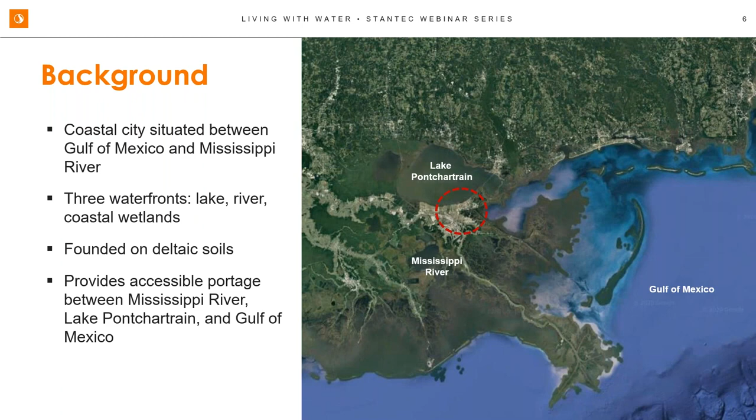Just to give you an idea of the terrain, on one side is the Mississippi, Lake Pontchartrain on the other side, and basically New Orleans is in a big bowl. It's below sea level, at times 10 to 15 feet below sea level. You can see where the blue-green corridors of the Gentilly Resilience District lie, at one of the lowest parts of the city. The whole city is protected by flood walls and levees along the Mississippi River and Lake Pontchartrain, which over the years, when a disaster happens like a Mississippi River flood or a hurricane surge on the lake, it'll fill the bowl. So when we've had breakages, we've built higher and made the system more resilient as these things have happened.

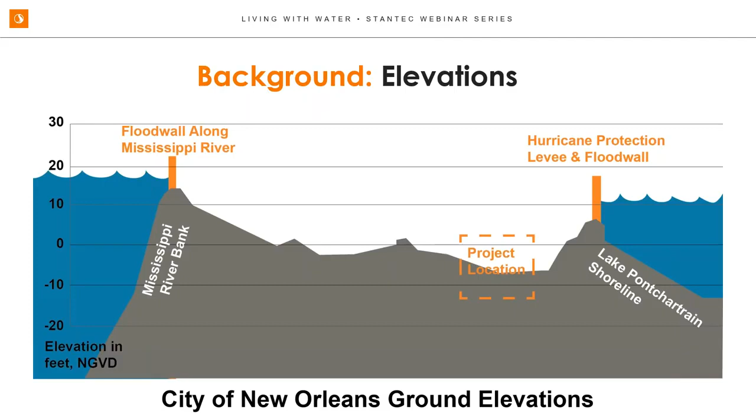Over the years in the 20th century, a drainage system was built. Pumps were built, levees, canals, and it allowed us to develop land that wasn't developable before and control some of that flooding that was uncontrolled in the early years. They were giant pumps - some are still in operation today - and New Orleans became the model for other areas on how to handle stormwater and control these really large flood events. It allowed us to develop areas like Gentilly, which was really a swamp. It's one of the largest pumping systems in the world, over 50,000 CFS for the entire system.

And it was strengthened over time. But even with all this pumping capacity and these giant pumps, the system can still be overwhelmed because New Orleans is in an area that gets really strong rain events. We get over 55 inches of rain per year, and we get some really intense storm events.

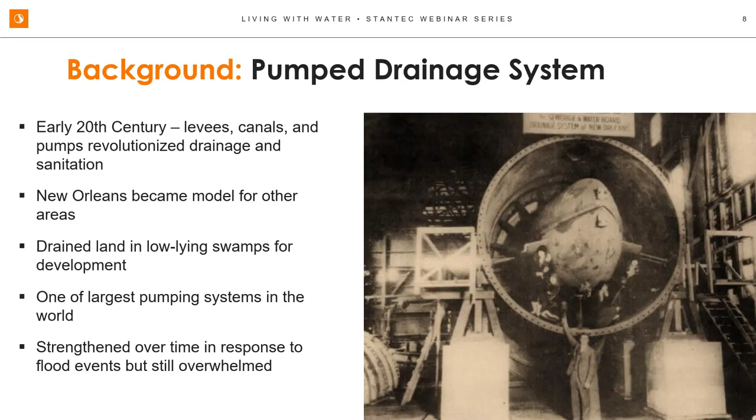One other thing that over time has really been a stressor to New Orleans is sea level rise, and more intense storm events. We've gotten really intense storm events, especially in the last 5 or 10 years. There was a storm event that gave us about 8 inches in 2 hours in a big part of the city, causing a lot of damage and flooding - that was only a couple of years ago. So we've been seeing these 100-year, 500-year storms, which you wouldn't expect to see very often, a lot more frequently.

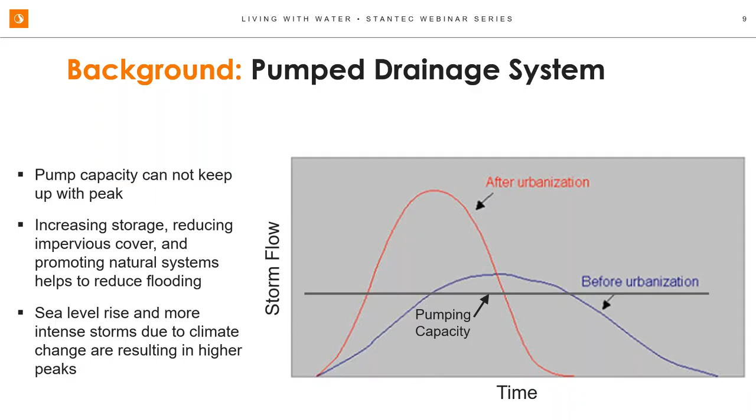Now, in 2005, everything changed with Katrina. There were over 1,833 deaths of people who lost their lives. It's interesting because the evacuation was actually really successful - about 99% of the people were evacuated. But the people that were left behind had nowhere to go, and in some cases there was about 15 feet of flooding in their neighborhoods. They just couldn't get up high enough in their houses. There were 50 levee breaches, and about $81 billion in property damages resulted from the storm.

You can see right there on 17th Street, that was one of the big levee breaks. The levee basically fell apart, and all the water from Lake Pontchartrain just poured right into the bowl and filled it up right to sea level. Approximately 80% of the city was flooded, and the pumping system was basically useless because it was all flooded, all the electrical systems were flooded, and the operators weren't able to operate the system.

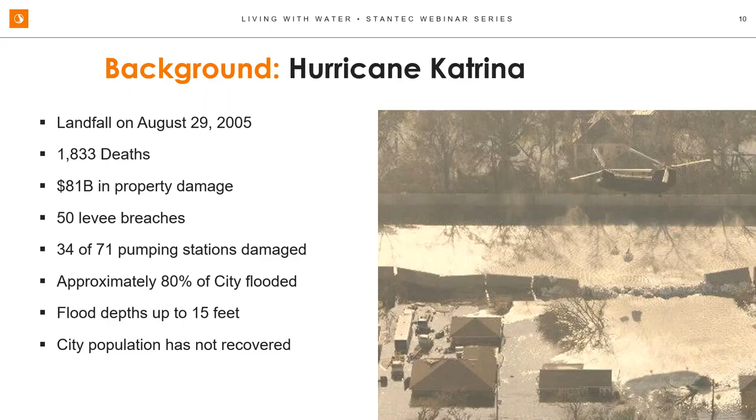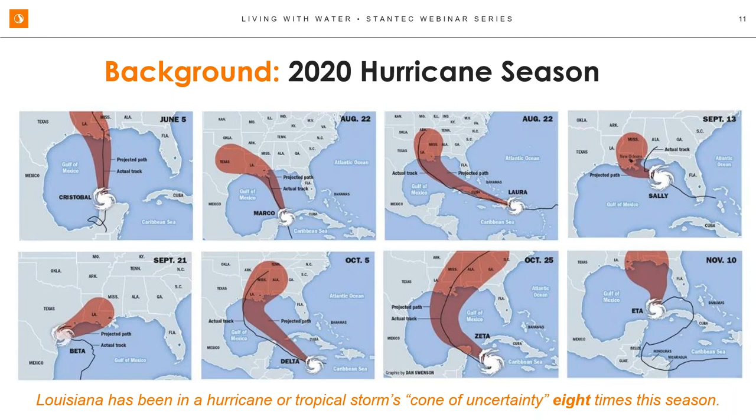This isn't a historical thing, we still see this threat from hurricanes. This hurricane season we've been in the cone of uncertainty 8 times. We got hit a couple of times, and this last one caused a lot of power damage, trees that fell, and branches. Luckily we didn't get hit with a major catastrophic storm, but our residents always live with this fear of when the next storm is coming, and we know at one point one of these big storms is coming. So we always have to build things with resilience in mind.

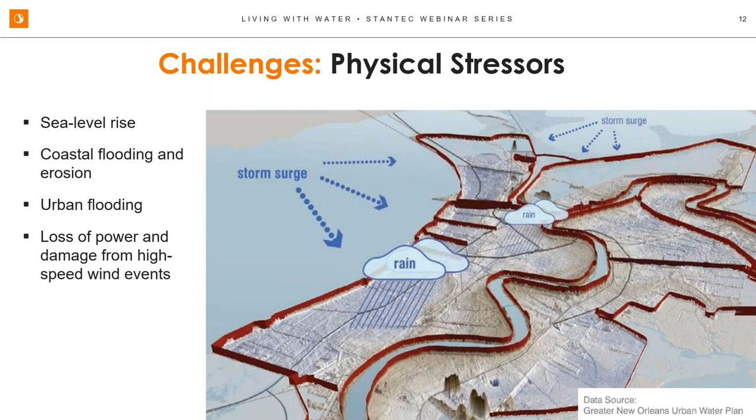Some of the stressors we have are sea level rise, coastal flooding and erosion. There's marshland south of New Orleans which historically protected the city from hurricane surges, and that has been eaten away over time. There's urban flooding as these more frequent storms have happened, and as I mentioned, loss of power. We spent a week and a half without power last month based on a hurricane that came through, affecting pretty much the entire city.

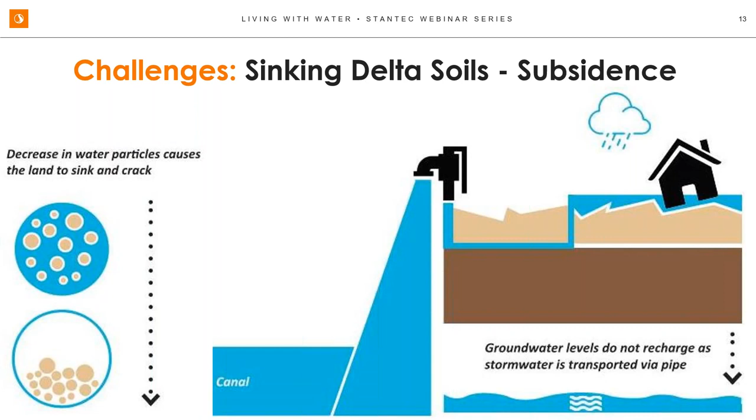Another challenge we have is subsidence and sinking delta soils. What we've always tried to do in New Orleans is pump the water out as fast as possible to get it out so it doesn't cause flood damages. What that's caused is those marsh soils, those organic soils, to dry up, and as they dry up they cause subsidence. You can see it in our roads, our houses, even sidewalks that settle. That's a big issue we have to deal with, and this project tries to find solutions for that as well.

Another challenge is the social stressors. A lot of these low-lying areas are low and middle income, and they get hit harder by some of these flooding events, because the upper areas, like the French Quarter, were built first on the high ground. These other neighborhoods that were built after are some of our lower income areas, as you can see by the graph there.

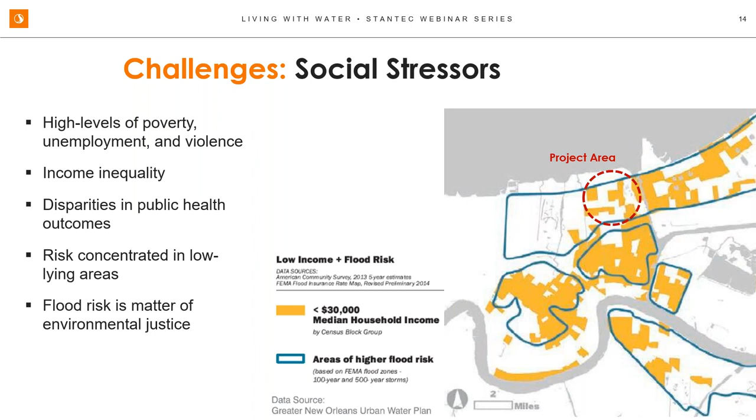There's our project area in red, but there is some sort of social inequity in how they experience this flood risk and the damages we see on a yearly basis here in New Orleans.

Talking a bit about building resilience: when Katrina hit, the Army Corps of Engineers and federal government put in $14.6 billion. The state and New Orleans also put in smaller projects, but this was basically to reinforce that ring around the hurricane risk reduction system around New Orleans. About 350 miles of levee and flood wall were strengthened. There were canal closures, really all the levee breaks happened in those 3 canals you see under the red circles, 17th, Orleans, and London. So the protection was pushed out to the lake to ensure that didn't happen again.

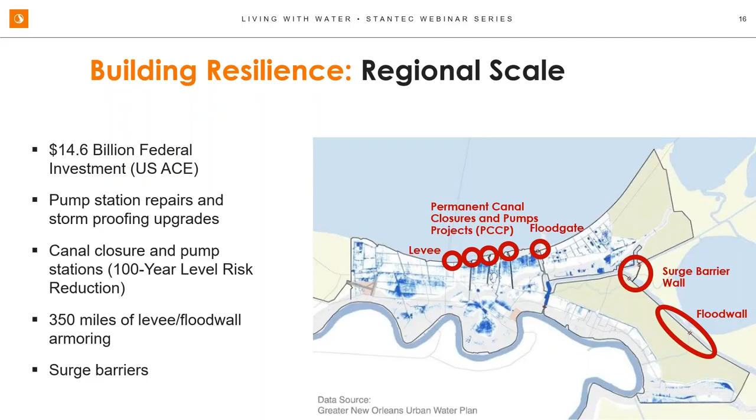There were also some pump stations and other big projects done as part of that 14.6 billion, basically to build back stronger and have a higher level, 100-year level of risk reduction for the city, at a regional scale.

The projects that were built really took resilience in mind. The pictures you're seeing are of PCCP, a project I worked on and led, which was a $731 million investment. It involved a big pump station at the lake, and included some flood walls and storm surge gates to close the drainage system and keep water from getting into the city. The pump stations that were added were able to drain a big part of the city once you close up for a hurricane.

And the pump station itself was 24,300 CFS. To give you an idea of that capacity, that is a lot of water coming through. It's 3 big canals, drainage canals that drain the whole city. And that fills an Olympic-sized swimming pool in 4 seconds. So it's a lot of water.

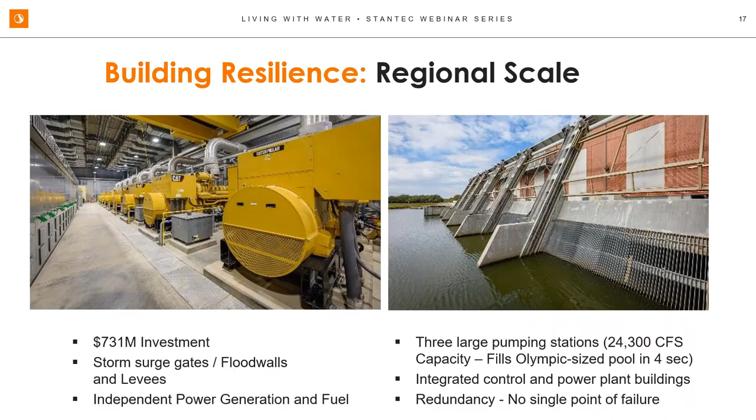These facilities were built to make sure that Katrina didn't happen again. They have independent power generation and fuel so the facility could be separate from the rest of the world for 5 days and operate. It has a lot of redundancy built in, and what we didn't want to have is a single point of failure. So all the electrical and mechanical systems have backups to make sure this facility could work when it's actually needed during a hurricane.

Go to the next slide.

But the city has been looking at alternate solutions and better ways of being resilient. One of the ways is moving from a completely gray system to a combination of gray and green infrastructure. I mentioned that things were being pumped out as quick as they came in. Well, green infrastructure slows things down and tries to smooth out that hydrograph at the peak of the storm by providing storage on the inside of the system.

One project about to finalize construction is Hagan Lafitte, and it includes a combination of gray system piping and reallocation of the basins plus green infrastructure to provide a complete system. We've seen reductions of flooding up to 4 feet in the model. That includes porous pavement, rain gardens, park upgrades, basically providing pervious areas wherever the neighborhood offers opportunities.

Go to the next slide.

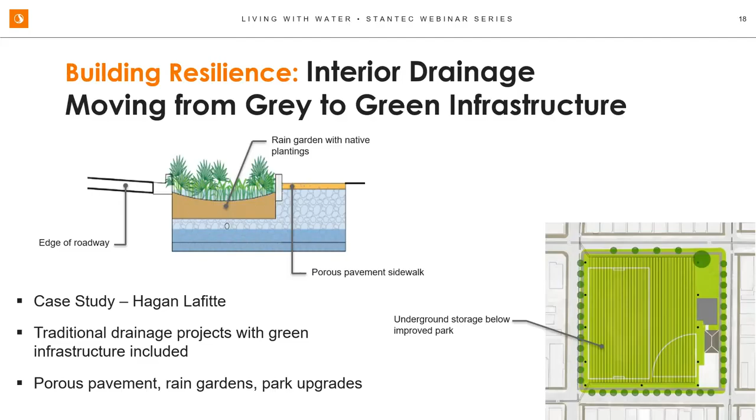So let's talk a little bit about the plan in action and blue-green corridors and how it relates. That's giving you a little history and background. Now the city applied for NDRC, National Disaster Resilience Competition. This is a competitive grant funding to recover from past disasters. So in order to qualify, you needed to have had a past disaster happen in your city. But the focus of the grant is to improve the ability to withstand future events, future hurricanes, and to be resilient, to come back quicker.

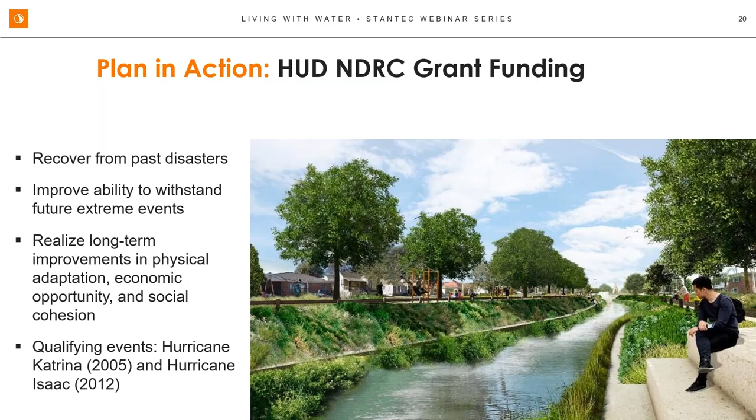And it really focused on the physical adaptation, which are physical improvements that we can make to the system, but also on economic opportunity and on social cohesion. So it's a HUD grant, and it's not just flood reduction. It focuses on really bringing the community back and focusing in on different aspects of resilience.

Go to the next slide.

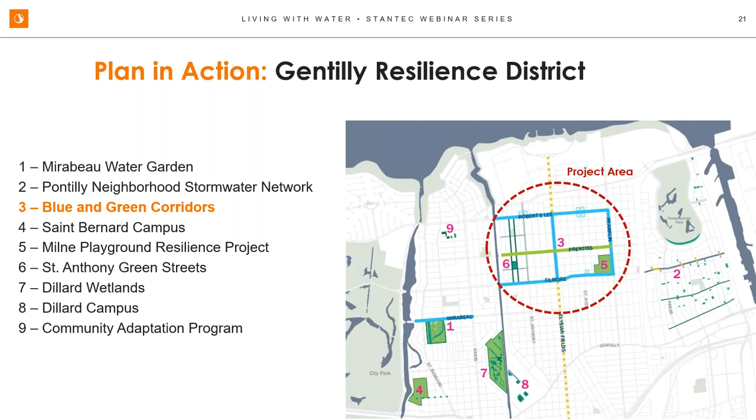So what the city submitted in the application was a number of projects. You can see the 9 projects there on the side for the Gentilly Resilience District, and it was creating a resilience district to get to a tipping point where these projects really improve the quality of life for the residents there. So it focuses on drainage as the main part of it, with enough green infrastructure and drainage interventions that it really causes an effect for the whole Gentilly neighborhood. But it also provides different amenities and things to really improve the quality of life there. And that's really the focus of the Gentilly Resilience District.

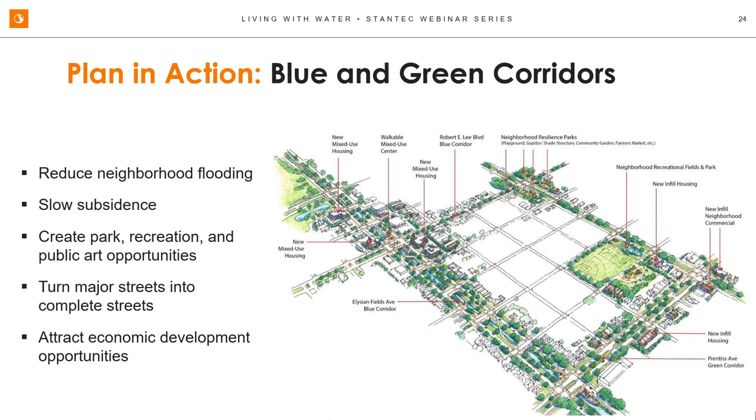So really this project is a shift in thinking: how can we use nature-based practices to capture water where it falls and promote infiltration back into the ground, while creating park and neighborhood amenities, providing safer routes for pedestrians and bicyclists through complete streets thinking, and attracting economic development opportunities. The intent is to manage water more successfully and to maximize the funding to provide the most benefit for the community.

Blue and Green Corridors is the largest of the Gentilly resiliency projects—a $40 million construction budget covering a significant amount of roadway. On the screen you see Robert E. Lee Boulevard and Fillmore Avenue, the east-west streets, roughly between London Avenue Canal—one of the canals that had a severe issue during Katrina—and Franklin Avenue to the east, plus Elysian Fields Avenue running north-south. That's about 3 miles of linear corridors we have to work with.

We're also looking at two stormwater parks at Robert E. Lee and St. Anthony Avenue, and four stormwater parks at St. Roch and Robert E. Lee Boulevard. Currently those are vacant grass lots with some trees we'll preserve, but we'll be looking at ways to use strategic storage within those lots to work within the system.

In addition to flood management, these corridors will be used as stormwater management facilities—I'll go into how we're doing that in a few minutes. But beyond that, we're looking at how to make the most of the money we have. Within these corridors there'll be improved planting—instead of turf, grasses and shrubs and practices that promote infiltration back into the ground, reducing the volume of water while also providing a water quality benefit. We're introducing lots of trees, playgrounds, and fitness areas, all with the intent of creating an amenity within a 10-minute walk for everybody in the neighborhood.

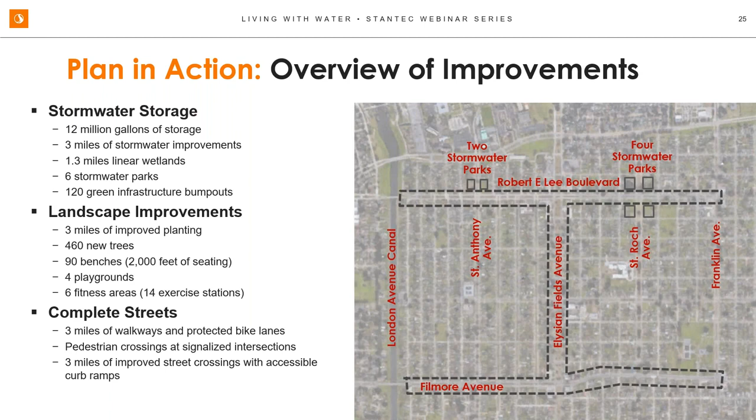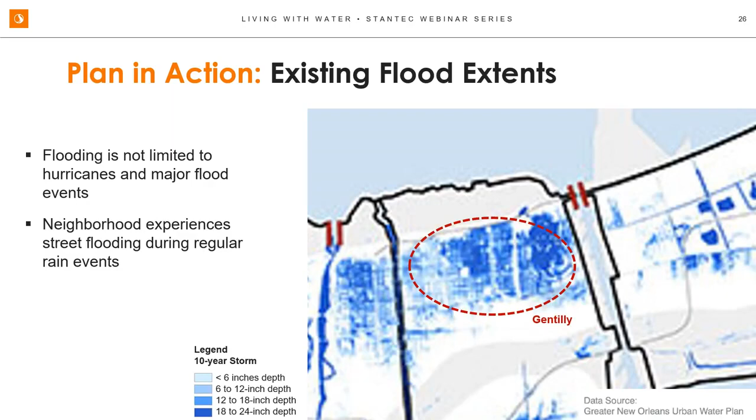Gentilly is an area within New Orleans that has seen tons of flooding over the years, not just from large hurricanes, but really from daily storm events as well. They get over 55, 60 inches of rainfall a year. So really it's looking at how can we deal with water in this bowl-shaped community that's sinking more and more every day.

We see groundwater maybe between 4 and 6 feet below surface grade. So that really presents a challenge as well: how do we strategically collect this rainwater and get it back into the ground?

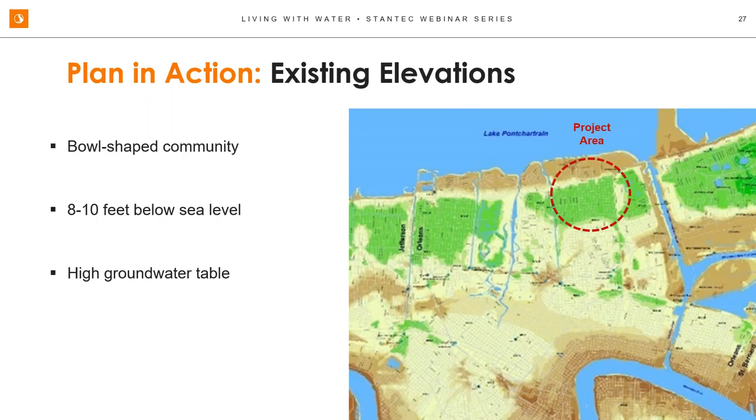The pumping system in New Orleans is very specific to this area. Again, it's that bowl-shaped community with perimeter controls around the outside. So when we get rain from a regular storm event, the issue becomes how do we deal with that rain? In the existing model, water is collected in catch basins or inlets on the street, routed into small pipes, then into larger pipes, into underground canals, Prentiss Avenue being one of them, eventually making its way to a pump station where it's pumped into an above ground canal, in this case the London Avenue Canal, and directed north to Lake Pontchartrain. So it's really a single source stormwater management system.

This shift in thinking that we're looking at is how can we collect water where it falls and strategically use that storage to prevent strain on the pumping system. How can we remove impervious cover and promote infiltration into the ground so that water doesn't make its way into the storm network system?

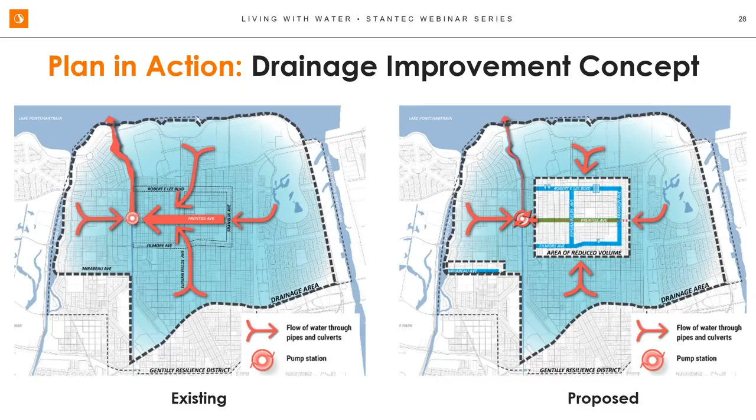On the right side of the screen is an approximate area of the project, where we're looking at finding strategic ways to pull that water out of the system during the peak of the storm event. As Dan mentioned with that hydrograph, the peak is what we're trying to manage here, because that's what results in this nuisance flooding we see so often. If we can create these strategic storage areas that temporarily hold the water, there's a lot of value in that, so it can be released back into the storm system after the peak of the storm has passed.

In most cases in New Orleans, there are streets divided by medians or neutral grounds, grassed areas that are mounded, that push the water back toward the edge of the street where it's collected in inlets and catch basins and routed to pump stations. Unfortunately, the neutral grounds don't provide much benefit here. They are pervious, which is good, promoting a little infiltration back into the ground, but they're not used in any way for flood management.

In our proposed design, we're planning to shift the water from the inlets back into the median, excavating 10 to 12 feet below the existing grade to create a permanent pool of water, a depth of maybe 4 to 6 feet, with a little bit of freeboard on top, another 4 feet or so, to handle those flood waters. The interesting thing here is that it's not just a drainage ditch. It's something we're trying to create an amenity out of, to tie down on those triple bottom line benefits that Dan mentioned.

So flood management, but also looking at the social value of adding a waterway into an area where New Orleans is interesting because it's surrounded by water on all sides, and the city has its identity built on water. But once you're inside these neighborhoods, you realize you're surrounded by concrete levees and flood walls all over the place. There really isn't that feel or sense of water. So this is really an innovative and creative way to invite water back into the community.

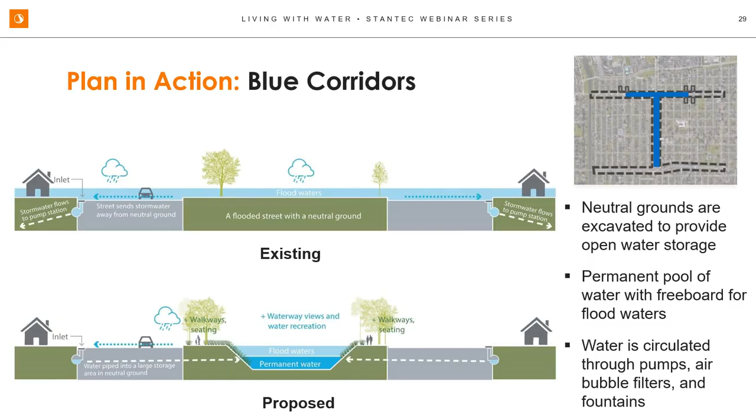In these canal systems, or linear wetlands as we're calling them, the water is circulated through pumps. There are air bubble filters, similar to what you'd see in a fish tank, that provide oxygen to the system. We also have pumps to circulate the water and fountains for more amenity.

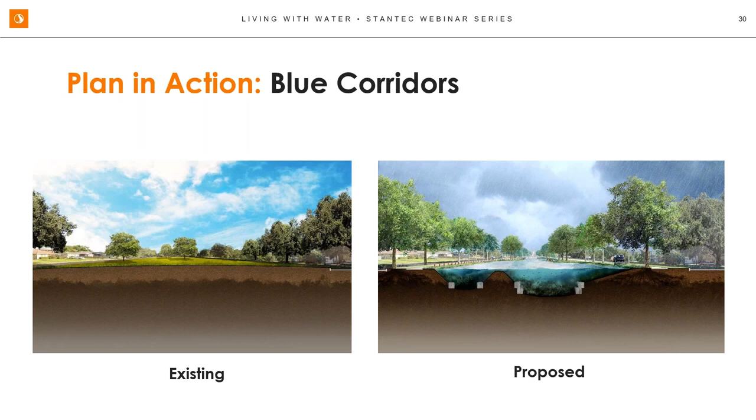You see two sections there. The main channel is a little deeper, and that'll be our linear wetland system. On the left of that proposed image is what we're calling a backflow marsh area. Those areas are slightly higher in elevation and have less water. The intent is to use them for flushing out the water and providing additional water quality benefits. As the water circulates within the system, it'll be brought to the top of a backflow marsh area and then flow back into the main channel. We have several of these throughout the corridor.

Green corridors are corridors that we're retrofitting with green infrastructure technology. In these cases, they weren't able to be blue corridors based on the width of the existing neutral ground or existing utility conflicts that prevented us from digging down as deep as we did on Elysian Fields. Again, in the existing condition, the neutral ground is slightly elevated and pushes water back to the edge of the roadway, where it's collected and sent to the pump station.

On these streets, we're looking to expand the pervious area to the greatest extent. Some of these streets were originally two lanes, and through our traffic analysis, we found they didn't need to be two lanes everywhere. The roadway widths were actually quite wide and didn't need to be. So we took advantage of some of those areas to create road diets, reducing the roadway width to make room for the additional green space we were seeking.

Green infrastructure practices thrive on the concept of capturing rainwater and managing it where it falls, to keep it out of the stormwater management system. This is particularly important in smaller storm events, where we're really seeing flood issues in the neighborhood. Green infrastructure is perfect for this because it's designed for that smaller storm event, and the intent is to promote infiltration back into the ground. You create temporary storage areas that can hold the water long enough for it to filter through the soil back into the groundwater.

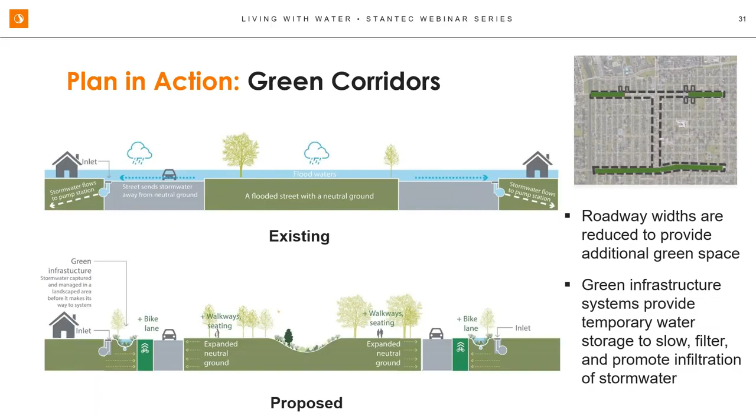What you see here is that while they create slight depressions able to hold water, in normal conditions they would be dry. So these are the two types of green infrastructure practices we're using on this project.

Median bioswales will be used within the median or neutral grounds. These are temporary storage areas planted with high quality native plants and trees, with a very absorbent soil, about 18 inches of an engineered soil media. These systems are all relatively shallow in the vertical direction because of the groundwater condition we have, so the intent is that they'll be flatter and wider systems than a typical green infrastructure installation.

On the right side, you see a stormwater bump out. A stormwater bump out is essentially a curb extension, where we take the curb and project it into the street, typically within a shoulder or parking lane. This can be done at intersections, as shown here, but mid-block is also quite common. For this project, we have bump outs at every single intersection, capturing the water as it comes down the street prior to entering an existing inlet structure.

Beyond stormwater benefits—promoting infiltration back into the ground, providing a site amenity, and improving water and air quality—this is also used as a transportation improvement, bumping out to reduce the pedestrian crossing distance across the street. This makes cars slow down because the road narrows in those locations, and it makes pedestrians feel safer since the crossing distance is shorter.

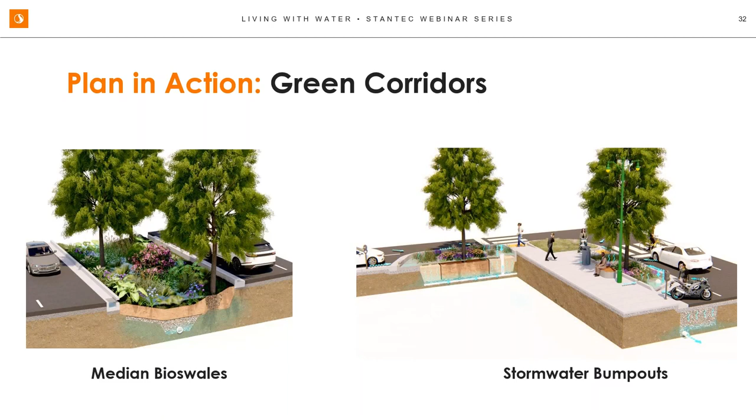We're also looking at parks with co-benefits. These are the 4 lots I mentioned earlier at St. Roch and St. Anthony, and Robert E. Lee Boulevard - vacant parcels taken over by the city over the years. The intent is to look at this with a triple bottom line approach: how can we address flooding, but also add site amenities to build social and environmental awareness and cohesion in the neighborhood.

These parks will have a mixture of open storage. Two parks will have water features with a permanent pool of water, and the other two will have more green infrastructure or temporary storage that can be flexible space - a slight depression in the ground to capture and filter stormwater runoff. During a dry event, they could also be used as seating areas or recreational space, making the best use of the space we have and creating the most benefit for the community.

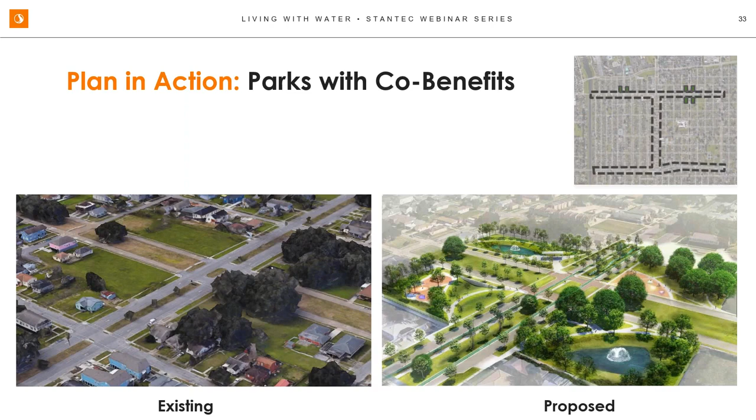We're also very focused on creating amenities throughout the corridor. We've done programming studies on how these corridors can become links to existing destinations, and how we can make these roads feel safer with better walkways and safer bike lanes so everybody feels comfortable. We also looked at how these corridors can become destinations in themselves, looking at 10-minute walking distances, as shown on the map, trying to put features along the corridor so there was something for everybody.

Not only do we have the 4 parks on the perimeter of Robert E. Lee, we have bicycle stations, fitness equipment, parks, and other recreational benefits, step-down areas for the wetland systems within Elysian Fields Avenue, Robert E. Lee, and Fillmore. We've also studied how these could be used as recreational and exercise loops, with signage indicating good running loops or exercise equipment loops. We've really thought through a lot of the programming on a much higher scale.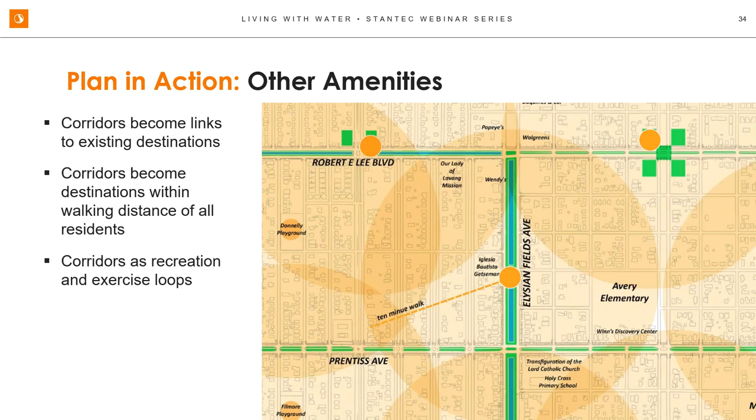There's accessible curb ramps at every intersection, stormwater bump-outs which reduce pedestrian crossing distance, and we're implementing bike lanes on every street in this project with bollards and striping - really to make them feel like they have their own dedicated space, provide safety, and encourage everybody to use this space without a vehicle.

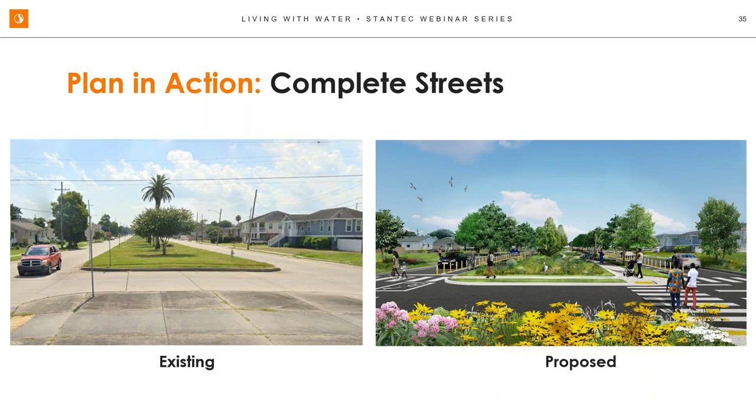There's 3 phases of this project. Phase 1 is Robert E. Lee, the east-west street on the north side, and Elysian Fields Avenue, the main street. Phase 2 is Fillmore Avenue, the east-west street on the south side of the project. Phase 3 will be the 6 lots. The intent was to debundle these packages so we could get everything moving and construction moving sequentially on all 3 projects. All work is meant to be completed by fall of 2022 - pretty exciting.

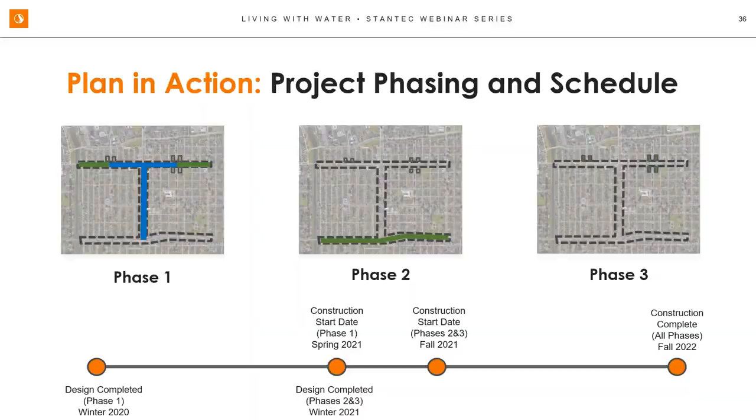With the HUD funding, there's a lot of documentation needed to define the benefits and ensure the investment is sound. As I've mentioned, we've done a triple bottom line benefit cost analysis - what that means is we're looking at the benefits of the project compared to the base case, the existing conditions, versus the design alternatives we've come up with.

Looking at the life cycle cost of the project - not only the cost to implement these practices, but what it costs to maintain and operate them into the future. It also looks at avoided costs, such as avoided costs associated with flood damage reduction and subsidence. Finally, what are the social and environmental benefits or disbenefits? In this case, it's all benefits because we're creating parks and features that promote nature first.

A BCA, or benefit cost analysis, looks at the present value of benefits over the present value of costs, and generates a ratio. A ratio of over 1 means the project is worthwhile.

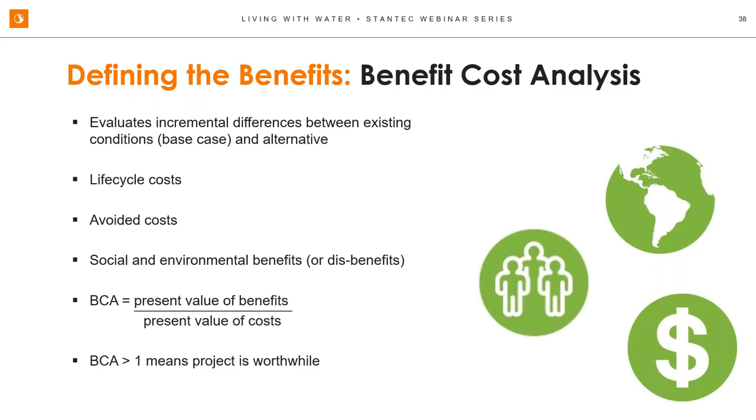Now, the interesting thing with HUD funding is that it really does look at this triple bottom line approach, whereas other funding typically only looks at flood damage reduction. With that said, flood damage reduction is the biggest benefit of this project.

The avoided costs are about $4 billion over the next 50 years for projects that implement these types of controls. The interventions we're doing are reducing impervious cover by implementing stormwater bump outs and road diets, increasing pervious area through larger medians, and strategically storing rainwater to reduce the peak of the storm event.

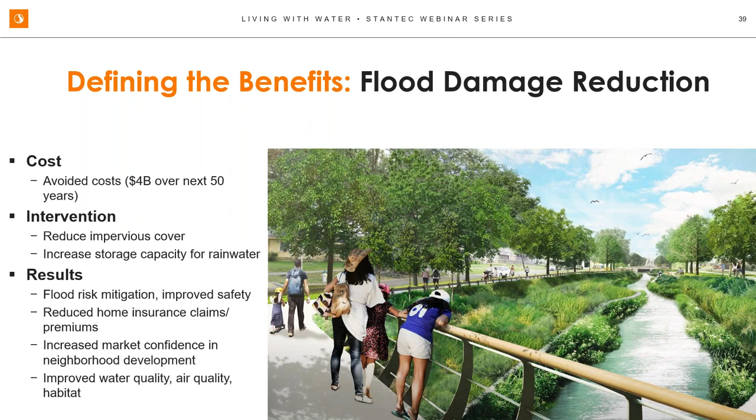Now, the results are pretty relevant: flood risk reduction, improved safety, improved confidence in the neighborhood. As Dan mentioned, everybody moves their cars when they know a storm's coming. The ability to keep your car there really drives confidence in the market to bring investment back into the neighborhood. And with all of that comes improved water quality, air quality, and habitat, because we're adding so much vegetation and removing that impervious cover.

As part of our project, we looked at modeling the existing conditions and the design alternatives. This is a dot map showing the storm reduction in a 10-year storm event, with the project area highlighted in red. As you can see, the depth of flood reduction varies throughout the watershed, but up to 6 inches.

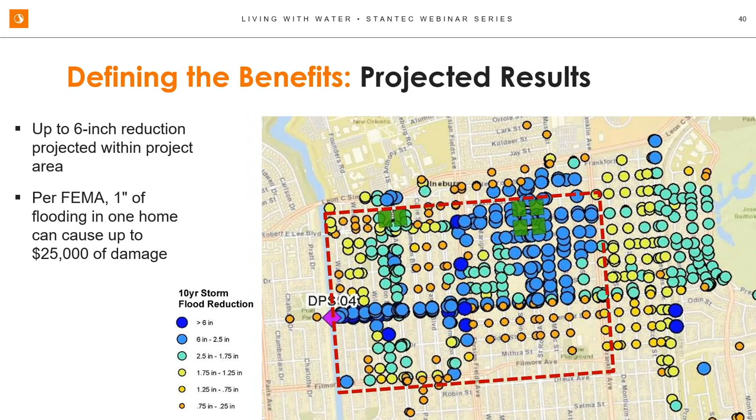And while 6 inches might not seem like a lot, per FEMA, 1 inch of flooding in one home can cause up to $25,000 of damage. If you just think about stepping into your car, that's only a few inches off the ground. So it's really the difference between saving your car, or a step up to your house, meaning water getting into your house. So 6 inches is very, very significant.

Now, the interesting thing about this project is when we modeled it, we found benefits beyond our project area, which was great to see. That's due to the interconnected nature of some of these watersheds and the way the pumping systems work. In this case, we're seeing about 2.5 inches of flood reduction in an adjacent neighborhood. It really drives home that as you implement these projects throughout the city and use this as a model for future development, there are incremental benefits even outside the project area.

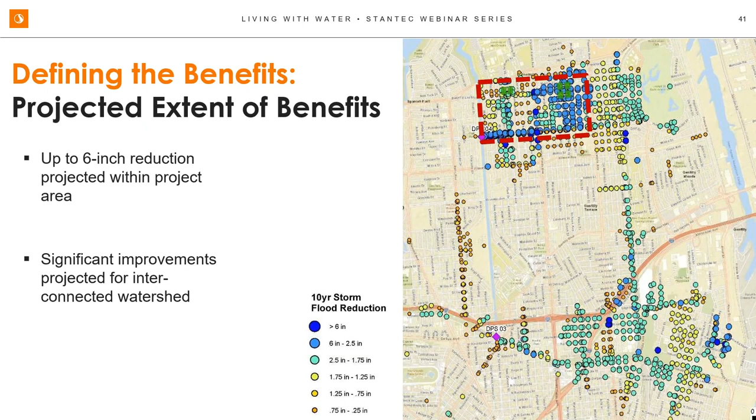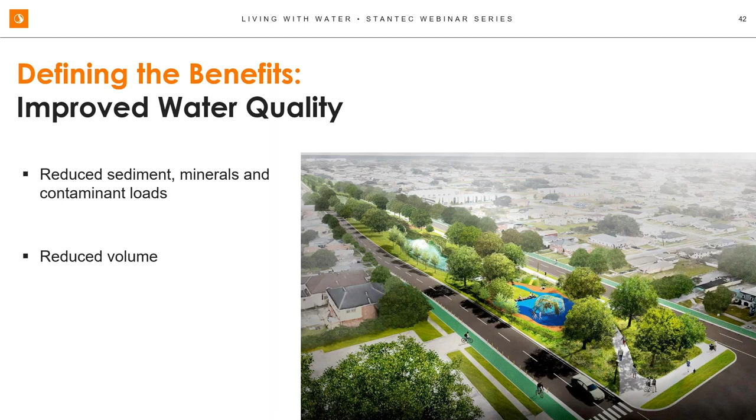We're also improving water quality. Water quality comes with a concentration and a volume of water we're trying to deal with. We're reducing the volume by strategically storing it in practices that infiltrate it into the ground, giving nature a chance to act as the best water quality filter. By filtering it through these soil practices, we're reducing the sediment, mineral, and contaminant load from the roadway stormwater runoff that we don't want in our stormwater system. We're using nature to filter it through high quality soil before it's infiltrated back into the ground, or in some cases put back into the stormwater management system.

Subsidence reduction is a very big factor on this project as well. As Dan mentioned, this project sits on delta soils, which act like a sponge. When wet, they retain their shape, but as those soils dry out, you get a lot of settling and cracking. Not only do they see roadway cracking, but settling where residents have to pour sand underneath their foundations. These are all slab on grade homes without basements, and it's pretty common for residents to put sand underneath their foundations to prevent settling. There are also utility cracks and upgrades needed as a result of this uneven settlement.

The city has estimated about $2 billion over the next 50 years in costs as a result of subsidence in this neighborhood. So really looking at systems that promote infiltration and keep those soils wet is how we're able to reduce subsidence. The results really look at the avoided cost of repaving roadways and repairing stormwater lines, increasing operation and maintenance timelines between roadway replacements. Again, we're looking at water quality, air quality, and habitat benefits as well, all by promoting infiltration and installing these green infrastructure practices.

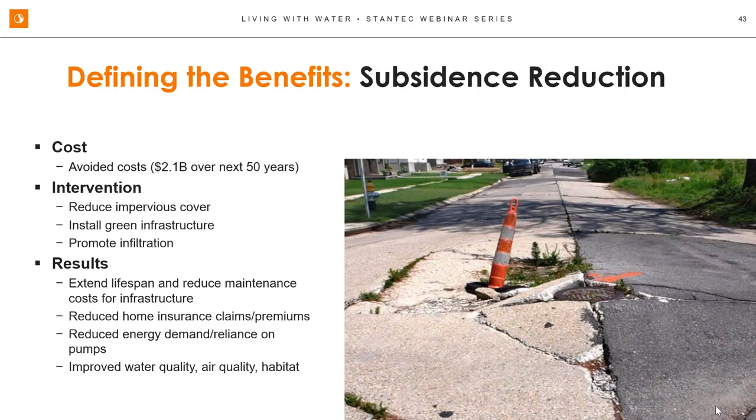And finally, improved quality of life. I think it's been a really fun time working on this project and really taking a hard look at what can we do to maximize the benefits.

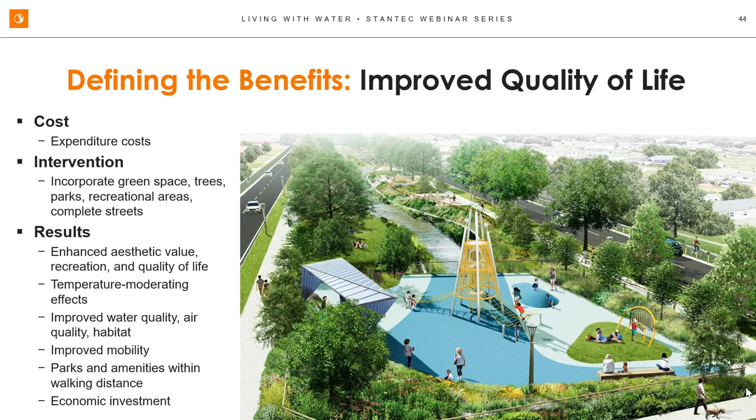This is a great picture at the top of Elysian Fields linear wetland where we've implemented parks, lots of green space areas for people to step down and look at the water, to really build social and environmental awareness and create environmental stewards for the future. Again, these practices are all located within walking distance, so there's an amazing park within every corridor of these projects, which makes it really great for the community.

So wrapping up with the benefit cost analysis, I mentioned how that looks at the present value of benefits over the present value of cost. You can see on the right side of the screen how that comes into play. We've used a program called AutoCase in addition to some of our internal modeling for flood and subsidence to develop this benefit cost analysis. Our results show the BCA ratio is 1.67, which is amazing. That means for every dollar spent, there's $1.67 in benefits. So really this project is well beyond worthwhile to do.

The greatest benefits we saw were from flood damage reduction, subsidence reduction, and improved quality of life. And the greatest costs, not surprisingly, are the capital costs to install the project, the operation and maintenance costs to maintain it, and the replacement cost as these assets become older and need to be repaired or replaced.

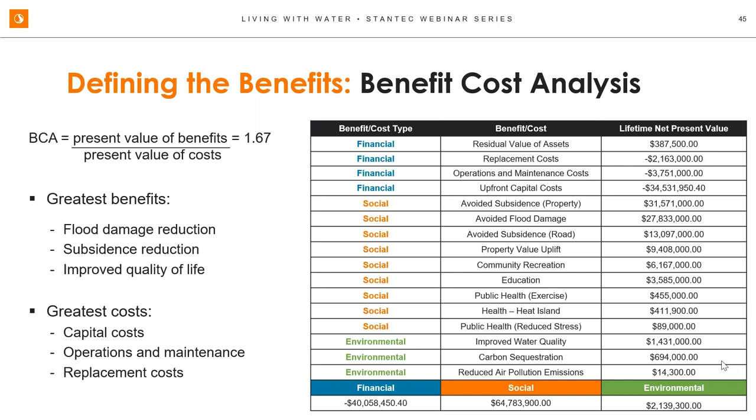Thank you, Bernadette. Just to talk a little more about those benefits, there are some health benefits we calculated based on the additional physical activity people could get in these bike lanes, walking areas, exercise stations and parks. It's really focused on getting people outdoors, providing enough shade in some of these walkways to allow them to enjoy this a larger time of year, and reducing the heat island effect that heats up these neighborhoods and sometimes makes them so hot it's unbearable. So this tries to provide that shade to make it more usable.

In conclusion, Bernadette did a great job describing all the components of the blue-green corridors. These type of solutions have to be part of any drainage plan, any project that cities, wherever they are, when they have these challenges of stormwater and other social and environmental challenges, must be incorporated into these projects. These newer technologies or ways of thinking can be adapted to any community, and we've done projects all over the U.S., in different soils and drainage conditions, with different water quality needs, heat, and community needs. So you really just have to customize the approach to your specific needs and what that project is.